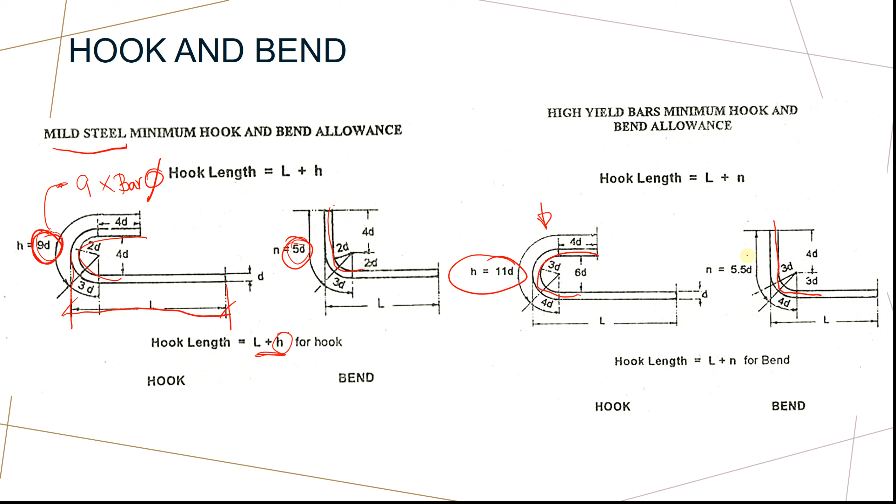So L plus 5D or L plus 9D, depende sa bend. Now for high yield bars, katong taas og yield strength, ingani po siya. Kung paingani siya yung curve, H is 11D, but if paingani lang siya 90 degrees na curve, we have the 5.5 times the bar diameter. Ingani lang na siya, wala yung magic manani, estimate lang yun na siya.

And then, kanino? Ay mong kalibog aning daghan na kay sir formula. I-ad ning giad kung pilang length diri plus kana, that is the total length. Ana na siya ka simple. So ang estimate for the steel reinforcement is imo lang jud siyang ihapon, total lang na siya nimo.

For example, kanino kaning pasirado. So that is just diri plus that length plus kani plus kani. So mo na siya si 2A plus 2B na siya. Pero nganong di sir kay kuan man siya? 3B, kay sobra diri man gud nga side ni tuyok siya gingana and then diri pag sa pikas di tuyok pag sa pigana. So mo siya na total og 3B. That's the reason why there is a 3B.

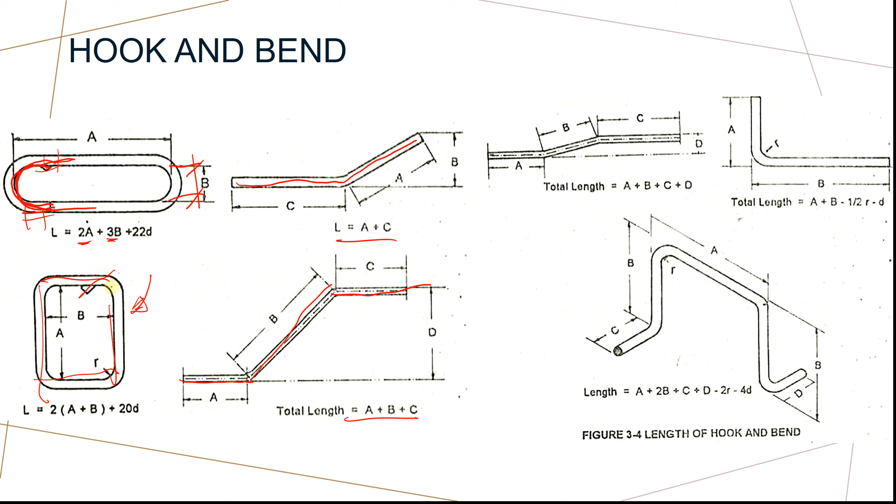Then kani po generally, for the ties, stirrups, so kanilang length ani plus ana and then of course we have the curves, duha ka curves, di ba? That is 2A plus 2B plus 20 times the bar diameter. And then kanisad, so actually total again siya tanan, you just add all the length. And then you have already your quantity for that specific bars.

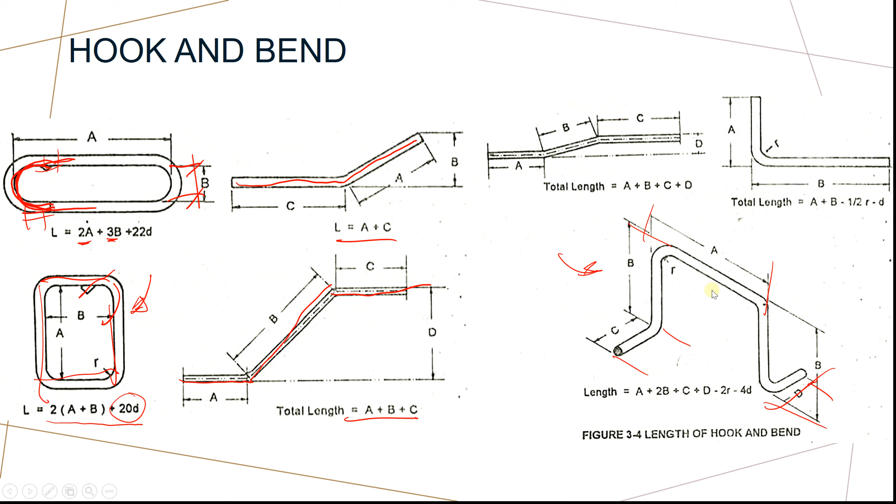So kanino ay mo karatula ni? This is just i-ad lang na siya nimo plus kani plus this one plus this one plus this one and then you have already quantity.

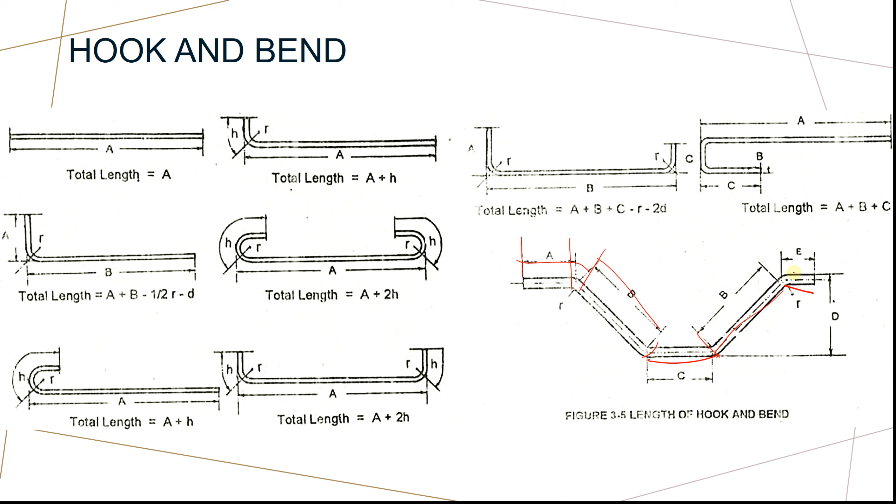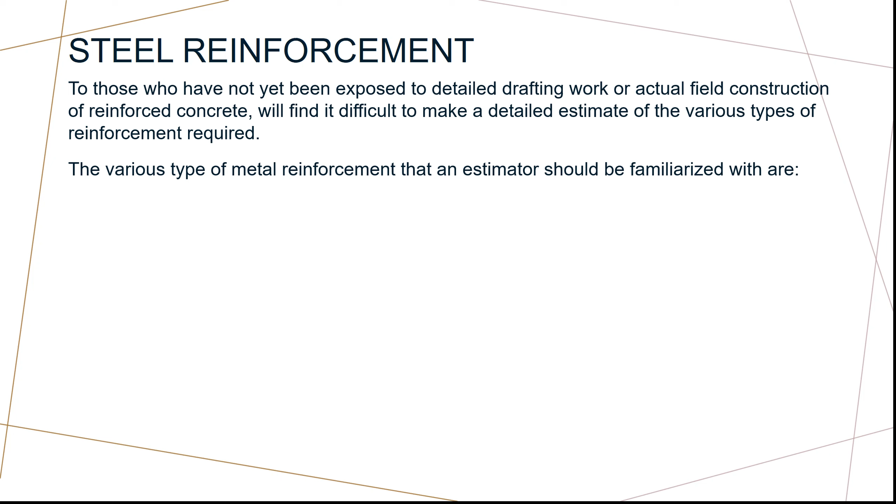So the various types of metal reinforcement that an estimator should be familiarized with are, so naman tayo we quantify the steel bar. So in a building, naa tay several elements in the building na gagamit of steel bar. First is we have the CHB. Sa CHB, naa tay vertical, we have the vertical and horizontal reinforcement, placed in between the layers and the hollow core of the CHB.

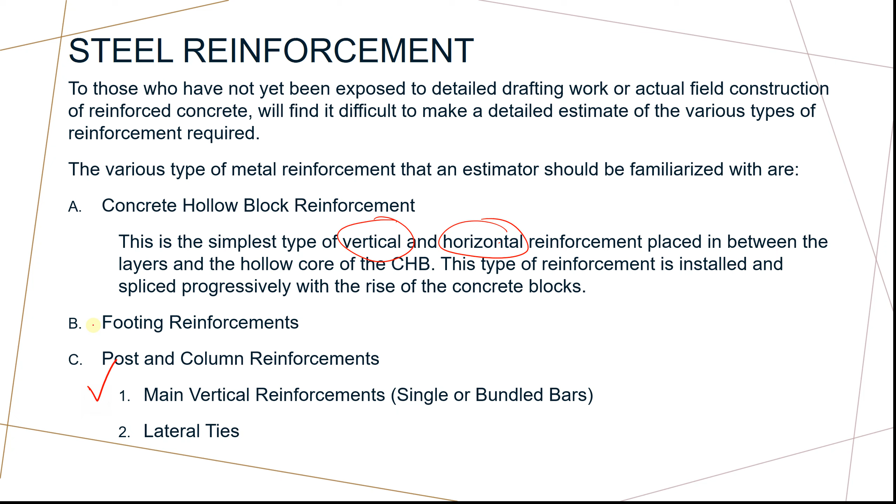And then sa footing reinforcement, these are also being considered, post and column reinforcement. So sa post and column reinforcement, duha na siya, we have the main vertical bars and the lateral ties. Ano man ang lateral ties, sir? So kung may patindog ang column, di ba, we have the main rebars. Kato ding i-ikuan nga dire ipalibot ni column.

So kung sa section view, di ba, pupunta na to, this is the section view, di ba? We have the bars. Kani silang mga bars, kaning katindog, the vertical bars, we call that the main bars.

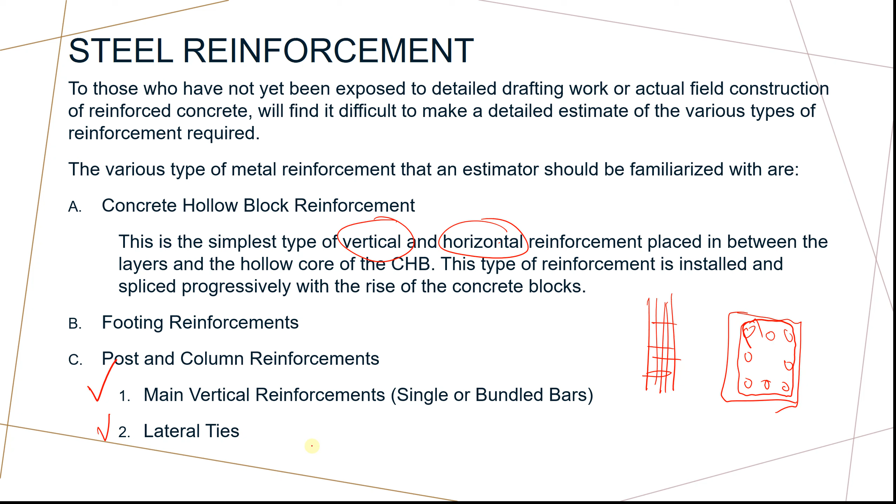Kaning mo palibot nila, we call that the lateral ties. So lateral ties, pag column, pag beams, ang tawag niya is the stirrups.

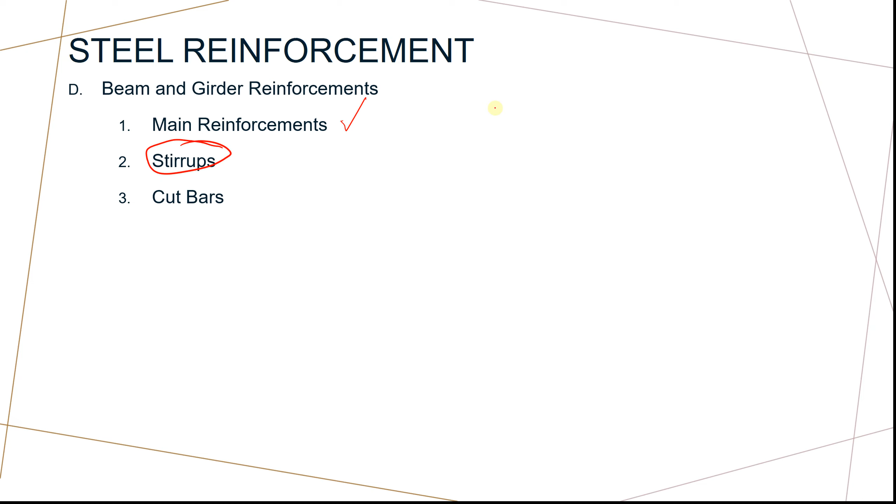Main reinforcement ni beam sad is mo tong kuan. Kani sample na to, kani sila and that one. Cut bars is katong mga support bars. So ang bars nga mangod sa beams, di man na siya all throughout the length. May mga bars nga dili lang sa support lang. So we call that the cut bars.

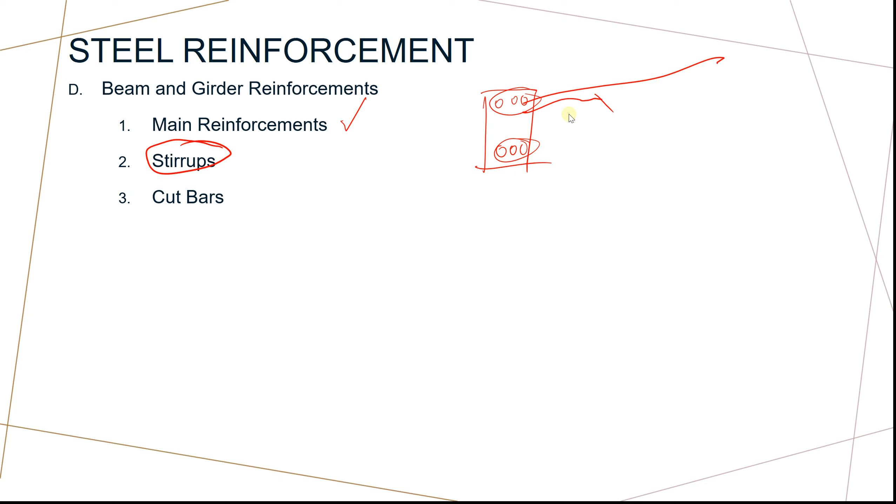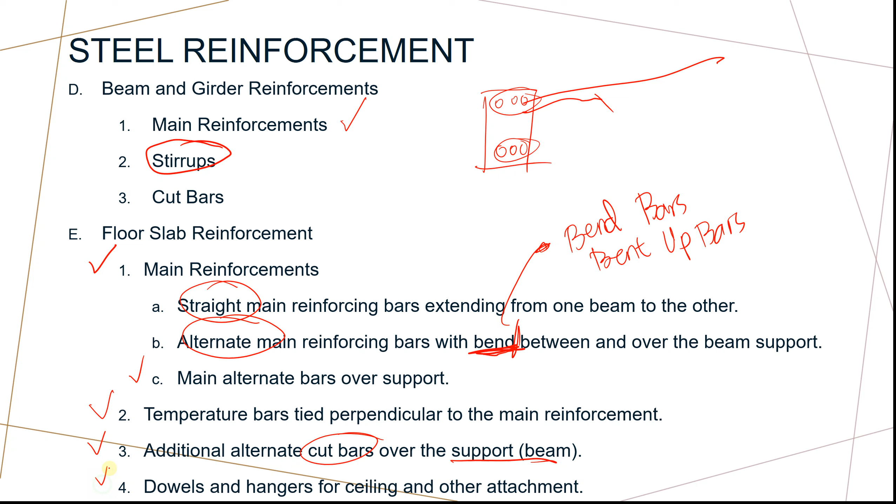And then for the floor slab, usa sa pinakakuting nga pag-quantify is the floor slab. You have the main reinforcements, and sa main reinforcement natin straight bars. Actually alternate, yung main reinforcing bars nga naka-bend, we call this the bend bars or the bent up bars. And sa main alternate bars over the support. Tapos na tayo temperature bars tied perpendicular to the main reinforcement, additional alternate cut bars. So we have cut bars over the support, and dowels and hangers for ceiling and other attachments for the floor slab and other types of reinforcement.

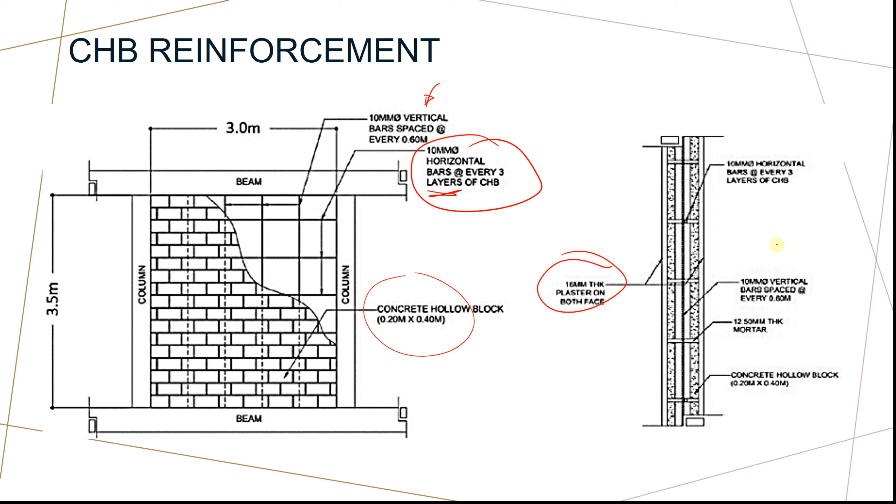And then, ang thickness ni plaster, it is also being specified in the plan.

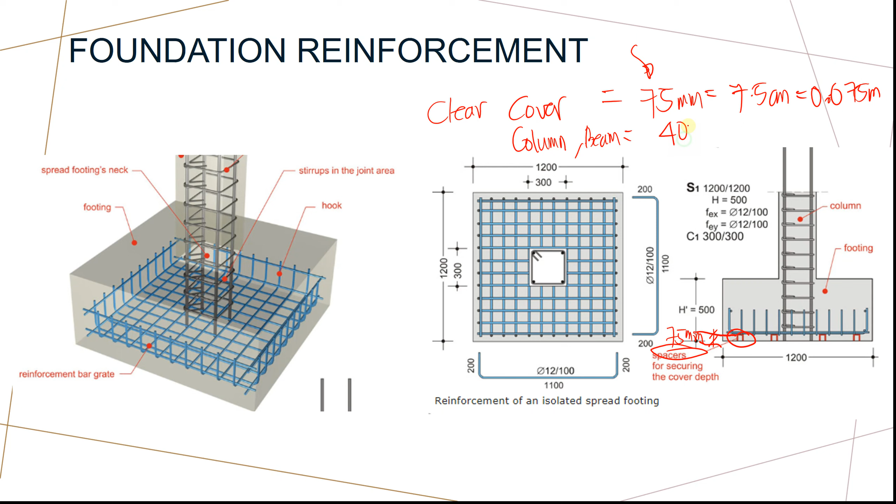Clear cover, this is for the foundation, and for the columns and beams, at least is 40 millimeters. So mo siya, no? These are foundations.

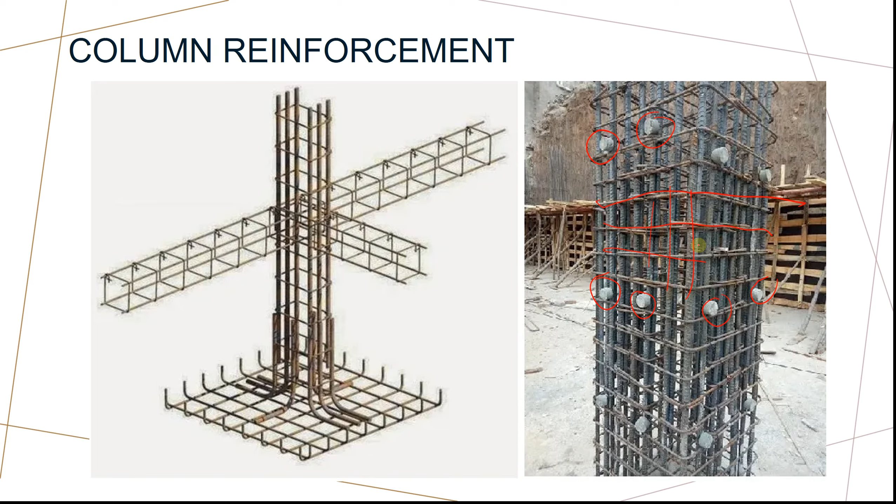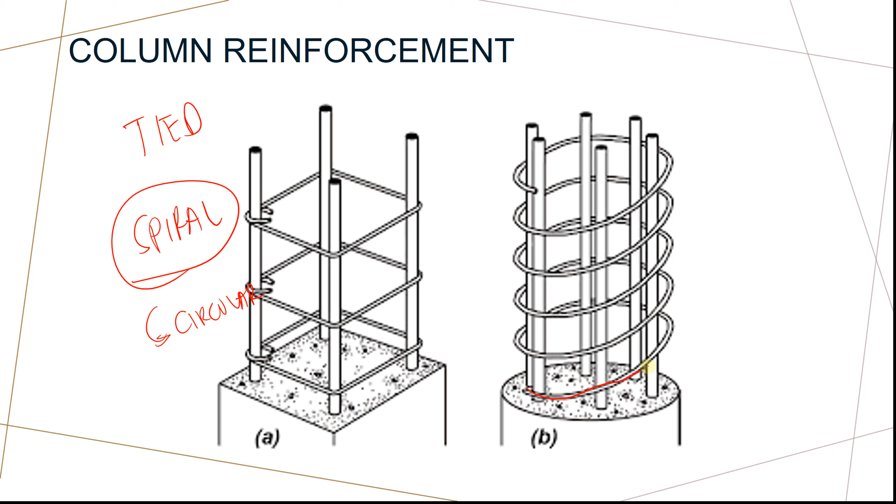Now duha ang klase sa column, natay ginatawag nga tied column and spiral. Spiral if circular ang column, tas yung ties, ang kanilang shear reinforcement is naka-spiral. Ang tied column, pwede square, pwede rectangle, pwede pod gihapon circle. Tied column. Kung sa spiral naman, si spiral is naka-spiral ang reinforcement for the tied nga circular column, nakalingin siya, per kuan siya, dili siya continuous or padayon like this spiral.

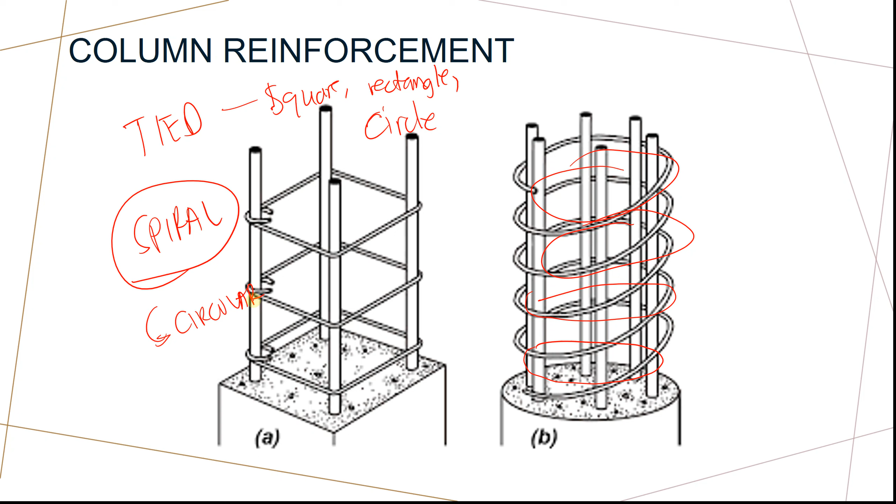By the way, ang inyo mamatigdan diri, ang kaniyang hook ni stirrup on one side. So mas maayo tag-kuan, puli-puli ni sila, alternate, dili sila on one side. So this is the bridge, sample of the bridge column reinforcement.

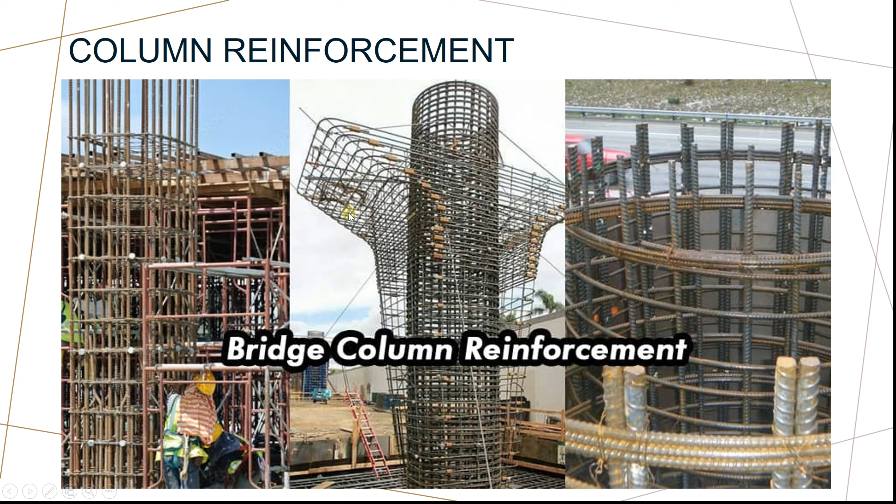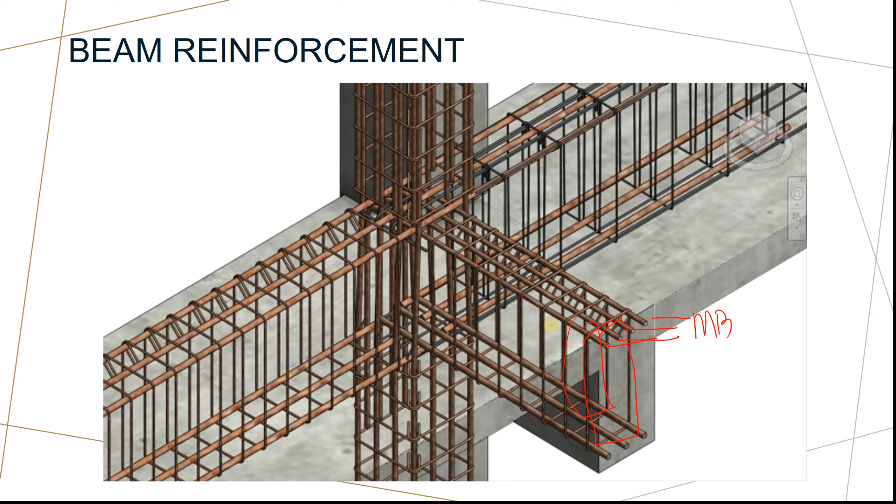And then this is the beam. So mo siya, we have the main bars, kani sila this is the main bars, and then kani din sila, kung natay lateral ties for the column, this is the stirrups. Kani, this is based from the actual construction.

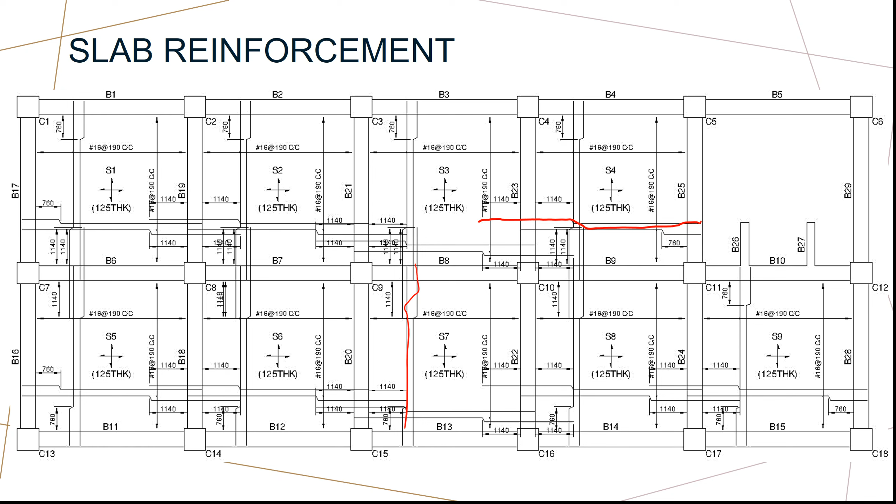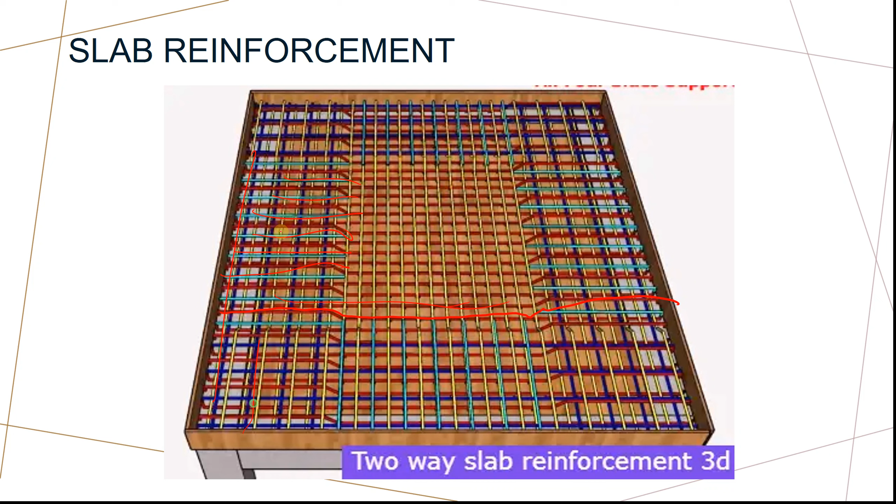And then slab reinforcement. Unsa man ang slab reinforcement? Imo matigdan, ang bars diri nga we extended sa pikas, etc. So this is an example of the slab layout in detail reinforcement. This is a two-way slab reinforcement in 3D. Daghan kayo rebar si slab, naa kaning ginatawag natong bent up nga mo curve siya, and then alternate na siya, straight, etc. Napagingay diri over the support, plus napagingay padayon didto along that direction, and then naitap sa bottom side. So this is an example.

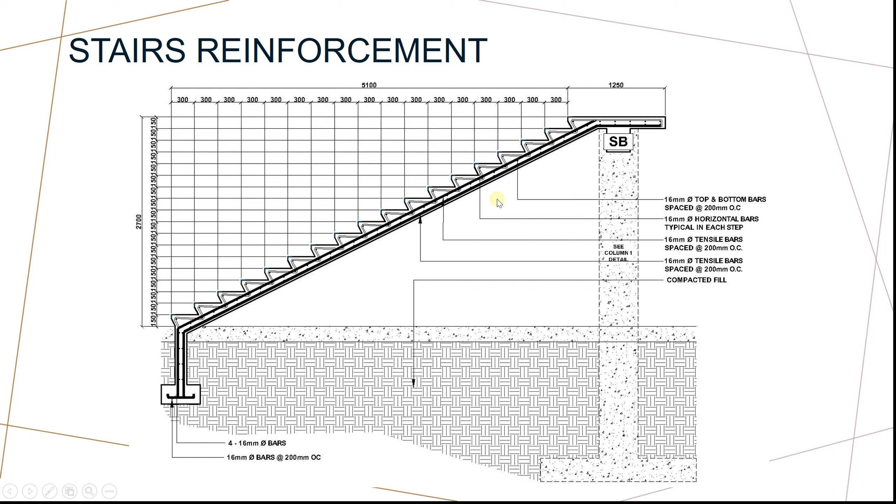And then other reinforcement, for example, we have the stair reinforcement, agdanan, sa ramp actually, daghan kayo, and other infrastructure.